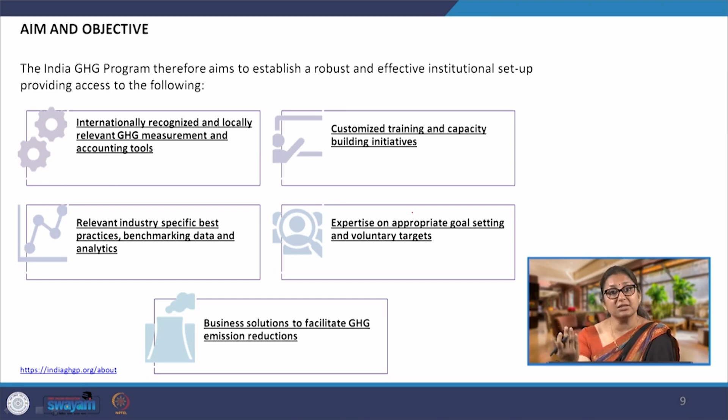The second one is customized training and capacity building initiatives. To take this intent of India becoming a net zero country forward, we need a lot of trained professionals, and India GHG program has been training professionals. They have conducted several training programs and trained hundreds of professionals who are helping take the India GHG program further. Then, to provide relevant industry specific best practices, benchmarking data and analytics.

A lot of industry members are showing support and trust in the India GHG program. We had also discussed as a challenge that when industries have to report their emissions data, transparency is needed, and the industry also has to have trust in reporting, so that there is no plagiarism and confidentiality is maintained. This is what the India GHG program is enabling, where members come together, share the best practices, and put together benchmarking standards and analysis.

So, averaging numbers, how and where things are happening and what are the average numbers that we are getting. Then it is also providing expertise on appropriate goal setting and voluntary targets for different industries, and they are also supporting with business solutions to facilitate GHG emission reduction.

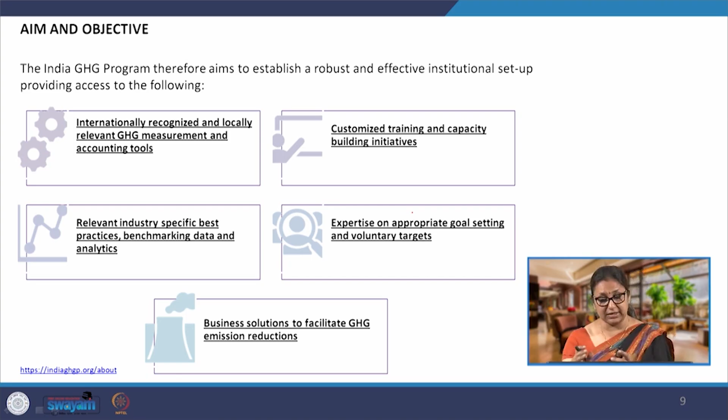Since it is a core group of experts working around GHG emissions, corporates, businesses and industries are seeking advice in terms of reducing their GHG emissions. So, that is also being provided by India GHG program. So, this is the aim and these are the objectives of this program, and what do they do?

So, they basically put all these objectives together, that is development of customized tools, training and capacity building, policy engagement and peer engagement. So, policy engagement as an objective we have not seen, but when they are developing the customized tools, they are developing the standards, they are coming up with average numbers, they are helping the government towards policy making, towards policy engagement, and that is what, despite being an industry led voluntary organization, they are capable of doing, and they are helping the government in moving forward.

So, if we look at each of these specific ones, if we look at development of customized tools, we will see that they develop the customized measurement tools and also identify the approach to calculate or measure the GHG emission. So, for each industry to calculate it, there could be several methodologies and several approaches. So, they are developing the customized tools for each specific approach. Training and capacity building we have already discussed, and peer engagement.

Since their member base is increasing, which we have seen, a lot of best practices and experiences are coming together and being shared. So, that is where it is making the progress faster by the peer engagement. And why are a lot of industries, corporates, businesses coming and joining India GHG program? Because it is a win-win for everybody.

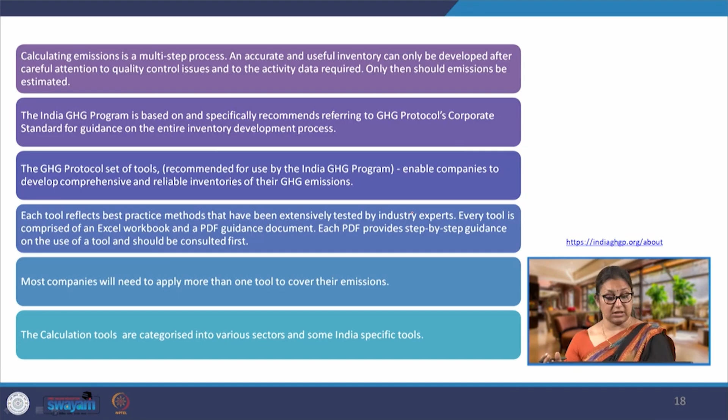So, if you look at the kind of tool sets that they have developed, there is a large variety of tool sets. Industry specific, for example, aluminum. So, specifically for manufacturing of aluminum, the kind of emissions that are happening, from where and how much, is what we can see in these tools. For example, manufacturing of cement. So, there is a specific tool set for the cement industry.

For example, iron and steel, pulp and paper, refrigeration and air conditioning equipment, semiconductors, wood products. So, for each of these sectors, they have been able to develop tool sets. There are multiple tools within each tool set kit for an industry, for a sector. So, that is what they have developed. I am just taking you through some of them to give you an idea of how these tool sets are working and what all is covered.

For example, this adipic acid tool. It is basically calculating the amount of nitrous oxide emissions from adipic acid production. If we look at the simplified equation, it comes to the N2O emissions as a resultant of adipic acid production, and this emission factor is the biggest contribution of India GHG program. This equation looks very simple, one can know that the N2O emissions are directly related to the amount of adipic acid that is being produced, and there must be some emission factor.

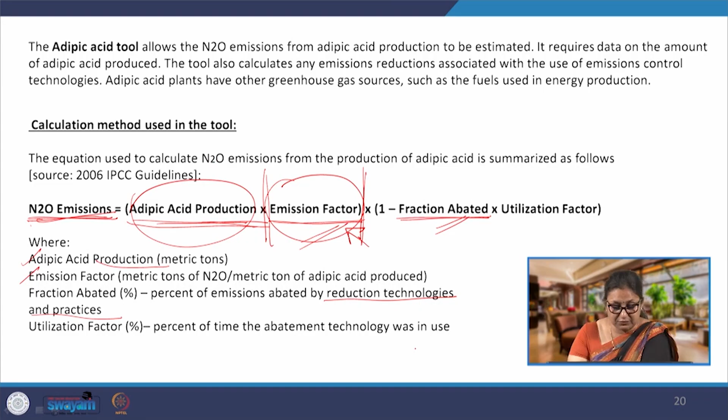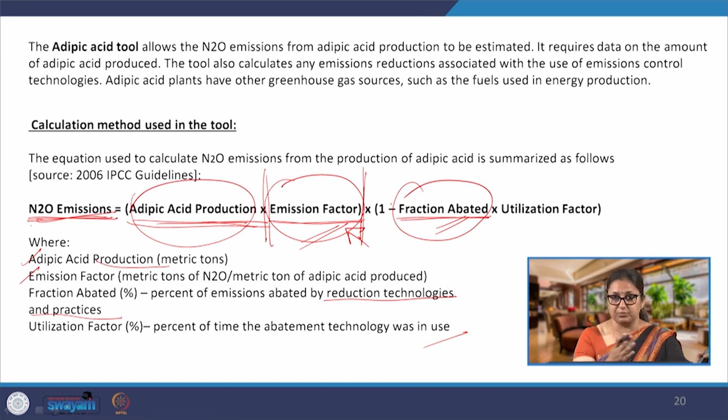So, this emission factor is the standard emission factor, but if certain company has already gone ahead and put to use certain emission reduction technologies already in place, the fraction that is reduced is the fraction that is abated, which has been accounted for here. And then the utilization factor. So, for this fraction abated, maybe the technology is not in use full time, it is only during certain times of the day or during the process that it is utilized. So, putting the utilization factor.

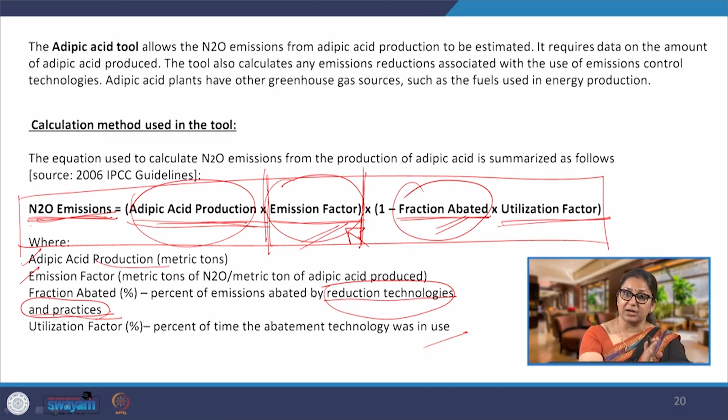Now, overall if you see, it looks a very simple equation, but putting in place the emission factors and identifying the reduction technologies and practices which can be accounted for in this fraction abated is the background work that has already gone into development of this particular tool.

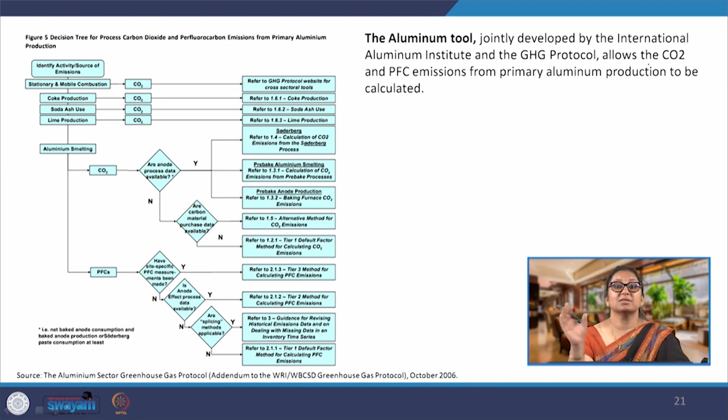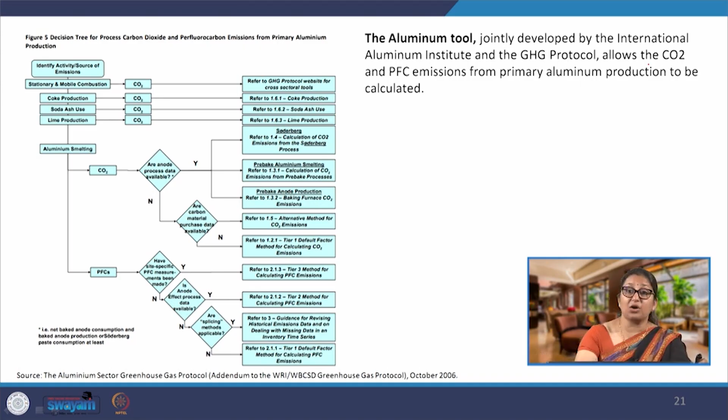Now, if you look at this primary aluminum production and the carbon dioxide and other emissions that are resulting from it, we can see this is the basic flow chart, the decision tree, and we would also see where all the emissions are happening. And through this basic flow chart, further are linked several detailed equations, each process resulting in certain kilograms of carbon dioxide or any other gas, and then their equivalent global warming potential. So, their carbon dioxide equivalent is how we are calculating the GHG emissions. So, this is how the tool sets have been developed.

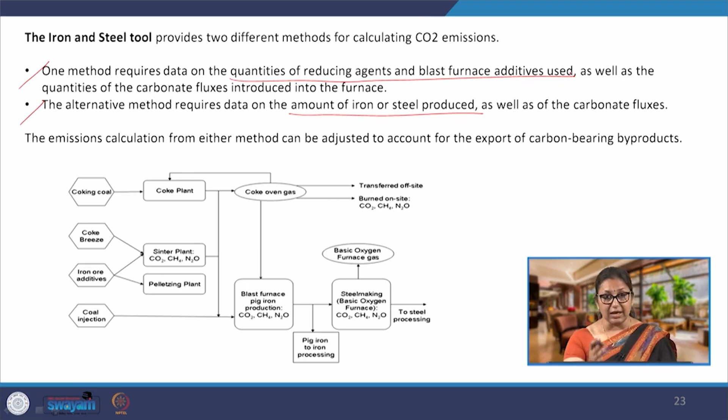Several tool sets, for example, for ammonia they have developed a tool set, for iron and steel sector they have developed the tool sets, and also not just one single approach, there are several approaches. For example, here there are two approaches that have been used. One approach is by estimating the amount of iron and steel that is produced, and the other approach is to know the quantities of reducing agents and blast furnace additives. Either way, the calculations are going to come the same, but depending upon the ease of data procurement, an industry can go with any of these approaches. So, for each sector and the tool set, there are different approaches that have been used, and that is what we will see in the tool sets here.

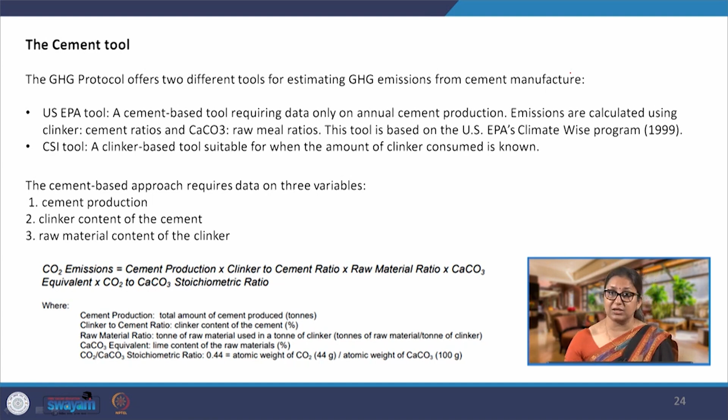And then there is a tool set for cement, again two different tools for calculating GHG emissions from cement manufacturing, and this is such a vast resource that we are talking about. It is putting a lot of data together in one place and then putting it to use. So, if we are talking about life cycle calculations, if we are talking about greenhouse emissions, all of that requires this data. And almost 2 decades back in our country, we had very little of this data available, and today this is a huge data set, and it makes the overall GHG emissions calculation and then reducing the GHG emissions much easier with the help of these tools.

So, we have for transport emissions, for power sector, and there is also a corporate tool which is called a do it yourself GHG accounting tool, which the corporates can use. So, for some sectors they have already developed the tool sets, and for certain other corporates a do it yourself GHG accounting tool has also been made.

For transport emission sector, we know that this is one of the significant industries contributing to GHG emissions, and it is also highly carbon intensive compared to certain other industries. Within that, there are 3 distinct programs that have been developed, one for air, the other one for rail transport emissions, and the third one for estimating the road transport emission factors. Now, look at the vast amount of data that they must have put together.

For example, we are talking about, say, air transport emission factors for passenger travel and material transport. Now, when we look at air transport, we are looking at a variety of airplanes, the manufacturers. We are looking at the fuel consumption and the emissions resulting from that. We are looking at the services which are going in. So, not just the air travel, but all the services on ground which are supporting the air travel, all of that is put together.

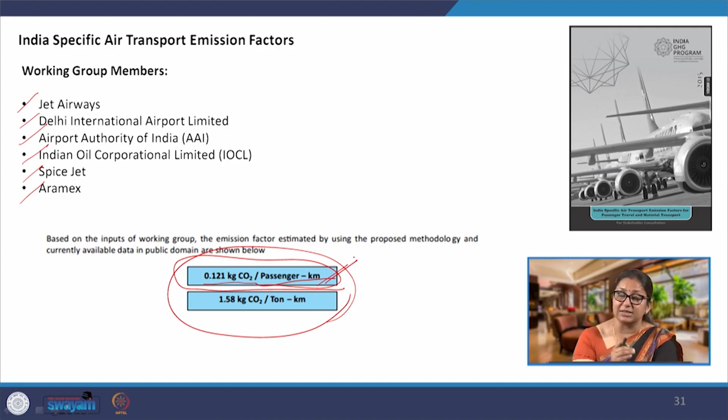Now, as a corporate or, for example, as an academician in a university, I have to report scope 1, 2 and 3 emissions tomorrow. If I have to do that, and in my scope 3 I have a particular head where I am accounting for international or domestic travel through air for employees, for students, for academic purposes, all I need to put in this head is how many people travelled, what was the distance that they travelled through air, and put this simplified number, and I will get the amount of GHG emissions. I do not have to go back and calculate GHG emissions for each activity. This is what this entire program has enabled us to do.

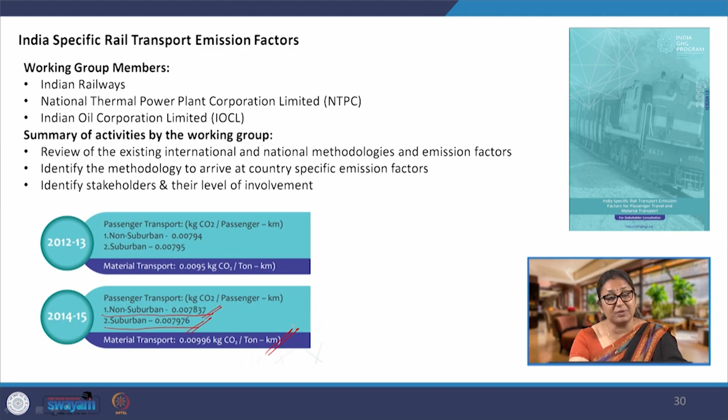Similarly, there are these specific rail transport emission factors, and if you look at the working group, again we have Indian Railways, which is running the entire railways in the country, National Thermal Power Corporation NTPC, and also IOCL, which is supplying the fuel. So, these 3 working group members have put together the number, and here again, for passenger transport in non-suburban areas, it is coming to be a very small number, this much kilogram of CO2 emissions per passenger per kilometer, and for suburban areas it is coming out to be this, and for material transport this is the number. So, again taking the example of an academic university, if my employees and students are travelling by rail, I know how much emission is being released into the environment, and the same is with road transport.

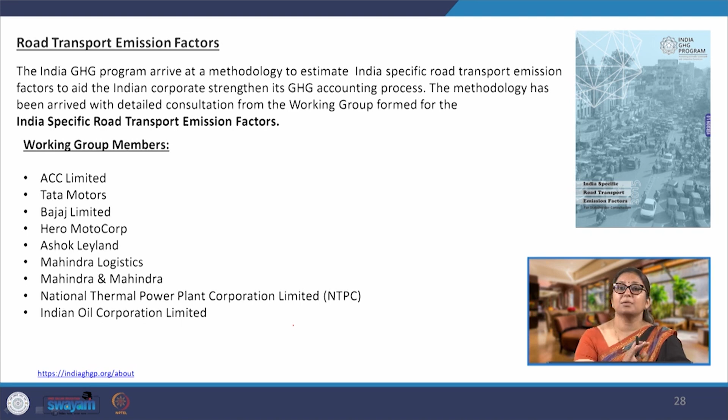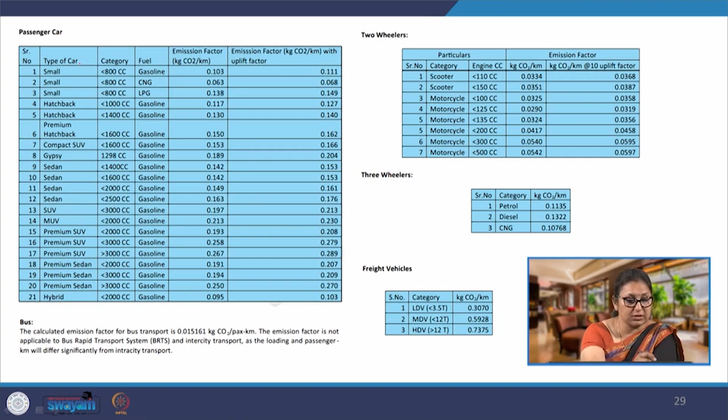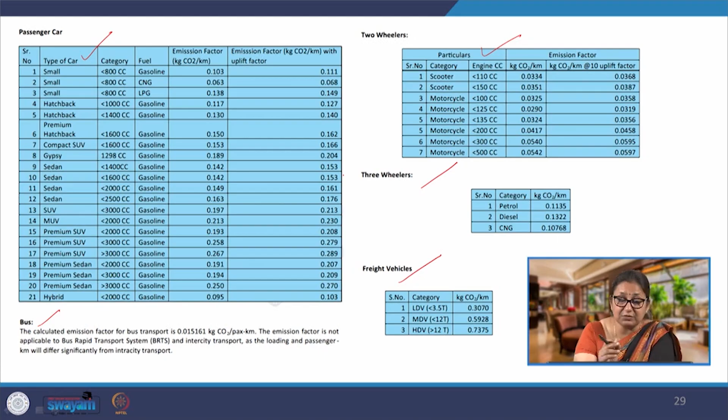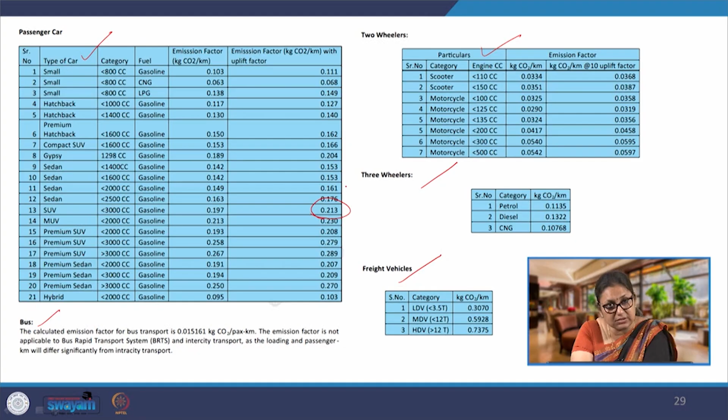So, for road transport emission factor determination, ACC Limited, Tata Motors, Bajaj, Hero Motocorp, Ashok Leyland, all big companies, Mahindra and Mahindra, NTPC, IOCL, have all been part of the working group, and a lot of data has been put together to come up with these simplified numbers. Different types of cars, 2-wheelers, 3-wheelers, freight vehicles, and also buses. All we have to do is identify the right type of vehicle and know the distance travelled, multiply it by this simple emission factor, and we will get the GHG emissions.

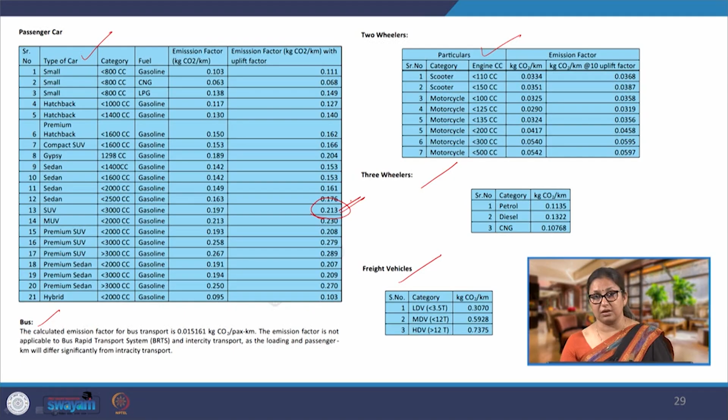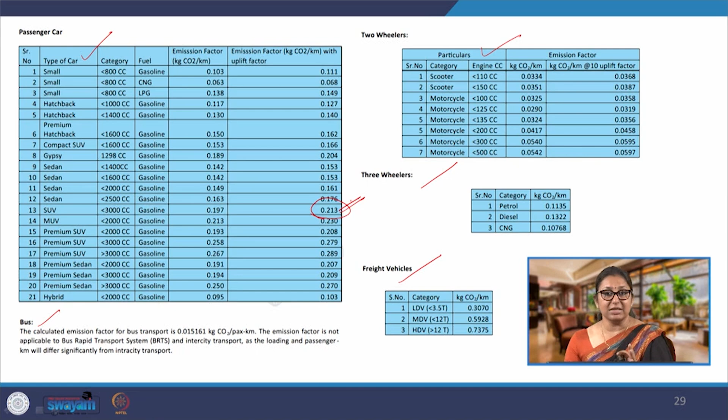So, this is the activity that we are talking about when we say that we have to clearly develop the inventory and account for the GHG emissions being released by each company, each corporate. This is what India GHG program has enabled us to do. A similar tool set is available for the power sector, and another one that I was mentioning, the do-it-yourself GHG accounting tool. Any corporate can use this tool. It is available in Excel-based format and also a web-based format. There are different activities given as prospective inventories, and you can select the exact inventory type relevant to your business, and it gives you certain emission factors, and you can put in the data and get the resultant GHG emissions.

So, I will stop here discussing the India-specific GHG program today, and we will continue this discussion further in tomorrow's lecture.